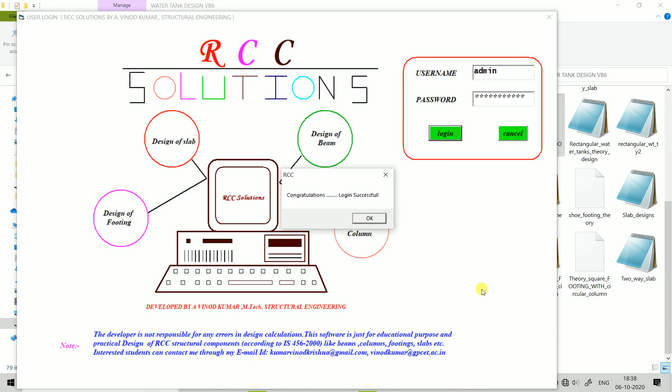In this video, I will show you a demo on design of retaining wall, cantilever retaining wall. Just click, then select cantilever wall. After selecting this, press on this cantilever retaining wall push button. Then you will get a user interface like this. You can see all these are inputs.

Before that, let me explain a little bit of theory. Just click on theory, then click on these different types of retaining walls. What is meant by retaining wall? Retaining walls are built to retain filled earth of greater height. They are commonly used in rail and road projects where earth filling is required to maintain track or road level, especially in approaches to bridges.

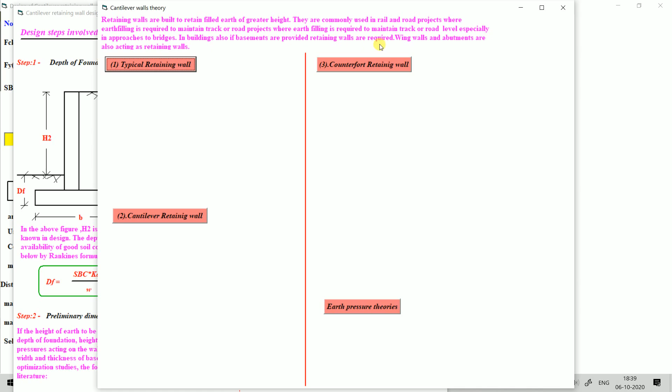In buildings also, if basements are provided, retaining walls are required. Wing walls and abutments in bridges also act as retaining walls. You can see here, this is the typical retaining wall structure. This is the cross section of the typical retaining wall. This is nothing but backfill. We have to retain this backfill by constructing this type of structure, called retaining wall.

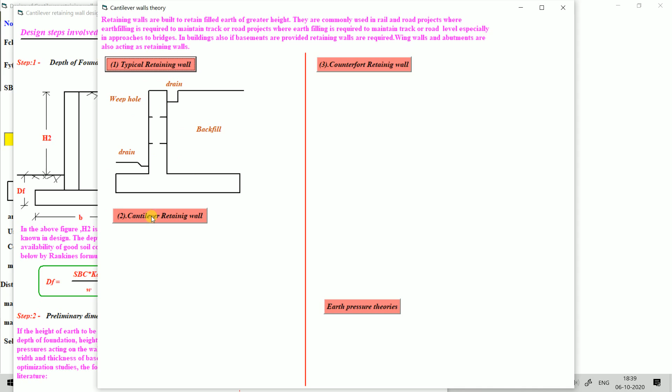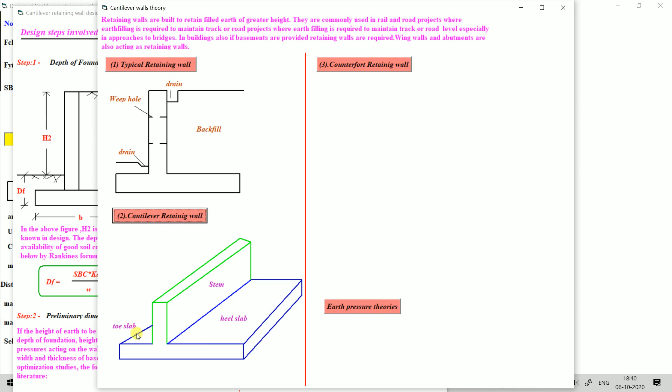There are many types of retaining walls, but in present practice there are two abundantly used retaining walls. One is a cantilever retaining wall. You can see here this retaining wall acts like a cantilever. Therefore this retaining wall is called a cantilever retaining wall. You can see here there are three parts: one is the stem, another is the heel slab, another is the toe slab.

Coming to counterfort retaining wall, this looks like a cantilever retaining wall, but extra they provide the counterforts. These counterforts are very useful to reduce the bending moments developed due to the lateral active earth pressure on the retaining wall.

These counterfort retaining walls are economical if backfill is more than 7 meters or 8 meters. The cantilever retaining wall is economical only up to a backfill of 6 meters. Then earth pressure theories. You can see here the different conditions for retaining wall. I have taken three conditions.

One is active earth pressure on stem if backfill is horizontal, second is active earth pressure on stem if backfill is horizontal with surcharge, and third is active earth pressure on stem if backfill is sloping. Ka is the coefficient of active earth pressure, Ka = (1 - sin φ)/(1 + sin φ), where φ is the angle of internal friction of the particular soil, and Kp = 1/Ka. Kp is the coefficient of passive earth pressure.

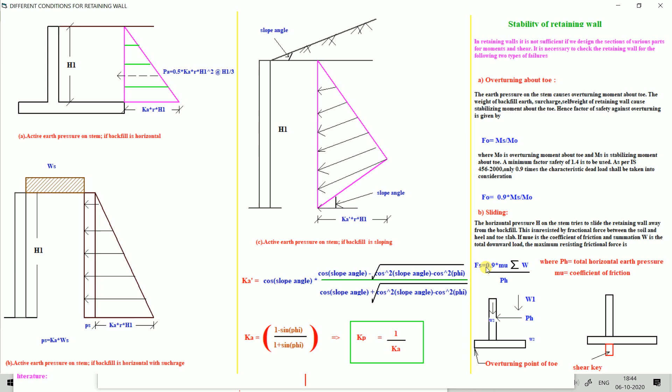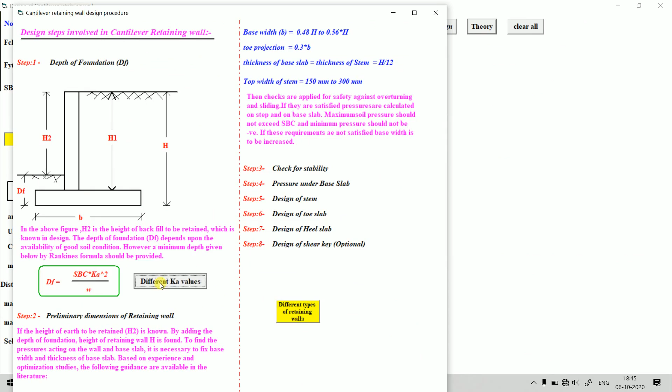Okay, this is all about theory. Then you can click here for different Ka values. You can see here values of phi, that is angle of internal friction for cohesionless soils. This is the material and this is the phi in degrees, the angle of internal friction. Sandy gravel and compact sand, loose sand, shale filling, rock filling, ashes, broken brick, all these have different values of internal friction for different types of materials. Okay, angle of internal friction of a particular soil.

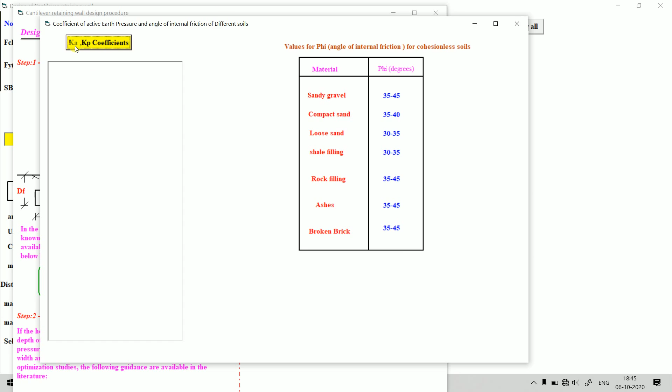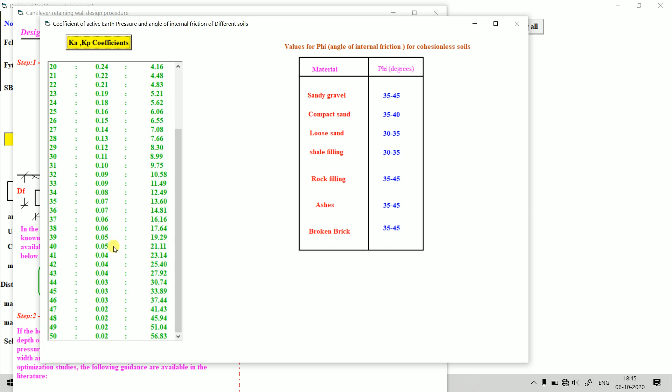Then you can see here you will get Ka, the coefficient of active earth pressure, and the coefficient of passive earth pressure. Just by a click, for different angles of internal friction, you will get different values of the coefficient of active earth pressure and the coefficient of passive earth pressure. Then you close this, and this is a little bit about the design steps involved in a cantilever retaining wall. Okay, all these are parameters.

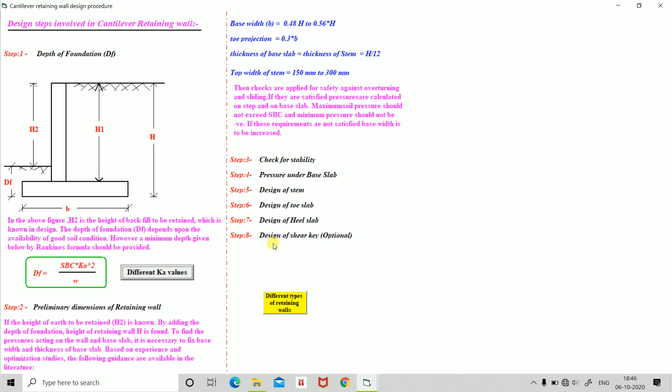First we have to design the preliminary dimensions of the retaining wall: base width, toe projection, thickness, and top width. Then we have to check against overturning and sliding. Then we have to calculate pressure under the base slab due to the earth pressure. Then design of stem, design of toe slab, design of heel slab, and design of shear key, which is optional. If the sliding fails, then we have to provide the shear key. Okay, this is all about a little theory.

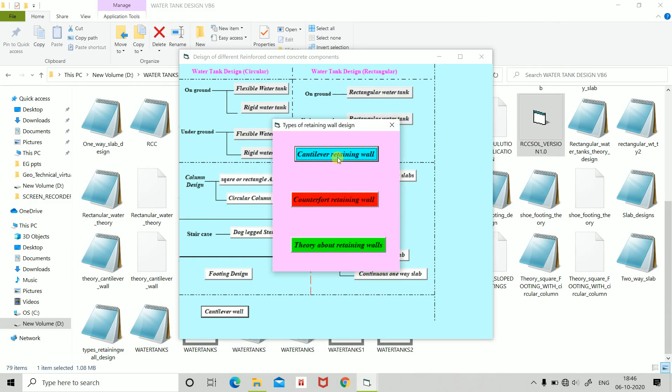Okay, just click on this retaining walls. Note: enter the input values only in the yellow boxes. Just type 25 grade of concrete, grade of steel is 415, SBC of the soil is 200, and the height at which the wall retains the soil is 3.5. Angle of internal friction of the soil is 30 degrees. Unit weight of the soil is 18 kilonewton per meter cube, and the coefficient of friction of this wall is 0.5. Main bar of the stem reinforcement I'm taking 10, and distribution bar of the stem is 8.

Then main bar of toe slab I am taking as 10, and main bar of heel slab as a 10 mm bar. Select type of stem: your stem will be uniform or non-uniform. If uniform, just type 1. Then start design. You can see here the retaining wall is safe in overturning. The retaining wall is not safe in sliding, so provide the shear key. Design is safe. Then the thickness of the base slab we have provided is sufficient.

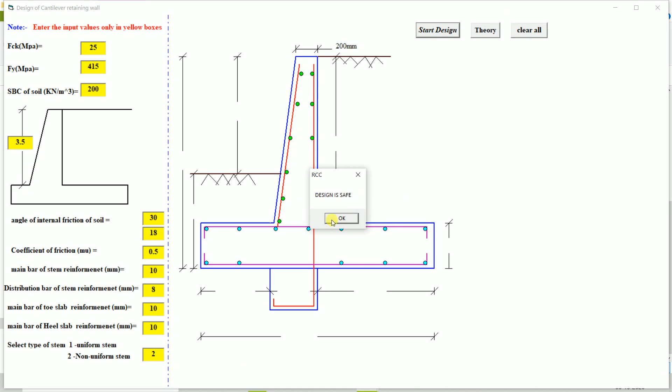If you want to clear this portion, just type clear, so everything is vanished. Suppose I want a non-uniform stem, like this. Just type 2 and click on start design. Retaining wall is not safe in sliding, so provide the shear key. Retaining wall is safe in overturning. Design is safe, and the thickness of the base slab is sufficient. See, now the stem is tapered. At the top it is 200 mm, at the bottom it will be 0.39 meters. Due to some technical problem, it is not visible here, maybe some problem in the coding.

Okay, this is all about the design of cantilever retaining wall.